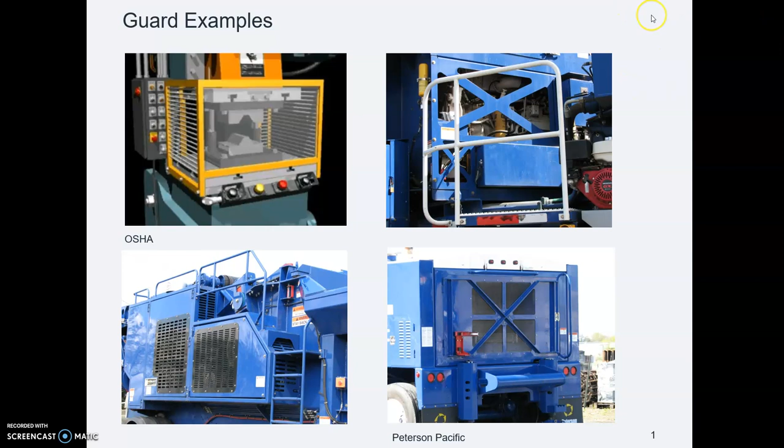So one of the things I collect examples of is guards, because when somebody says, hey, here's this machine, why don't you design a guard, you don't want to just say, oh my gosh, I have no idea how to do that. You want to go, just a minute, let me do a little research and I'll get right on that. So let's look at some ways you could do guards.

One way you could do a guard is make your own guards in your company's shop, out of plain old sheet metal. Here are some examples.

In the two upper left pictures, you'll notice these guards are quite simple—just flat pieces of sheet metal. This one has a little bit of a bend in it, and this one has some slots for adjustability. Those are fast and therefore inexpensive.

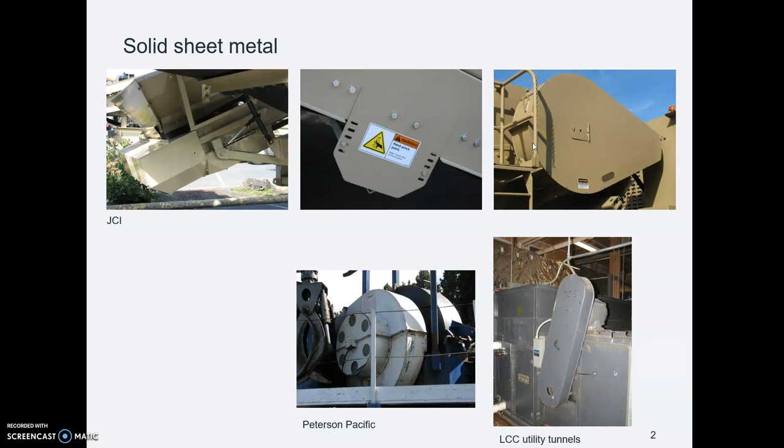This one here in the upper right is carefully designed to fit around two sheaves with a V-belt drive. Sometimes you need to do that for whatever reason, but be aware it does take up extra time in the shop to fabricate all that stuff.

Here are some other examples. In the bottom picture, from Peterson, here's an example I referred to earlier when talking about nip points. I mentioned you might not need a guard around the entire rotating thing if it's the bottom of the rotating thing and there's no nip point. This is probably a head pulley on a conveyor, and the belt will be going this way, so it cannot suck the operator in—you don't need a guard all the way down. Notice how a guard can serve more than one purpose.

If you go out and talk to the people in the shop—and I really hope you do, because they are the experts in making this stuff and sometimes in using it—let's say you're designing this white belt guard. They might tell you, if you weld some Gratex steps on here and put up a handrail, I could use this thing to climb over the equipment. So now it's not just a guard, it's a thing to climb on. And you will say, that's a very good idea, I will do as you suggest.

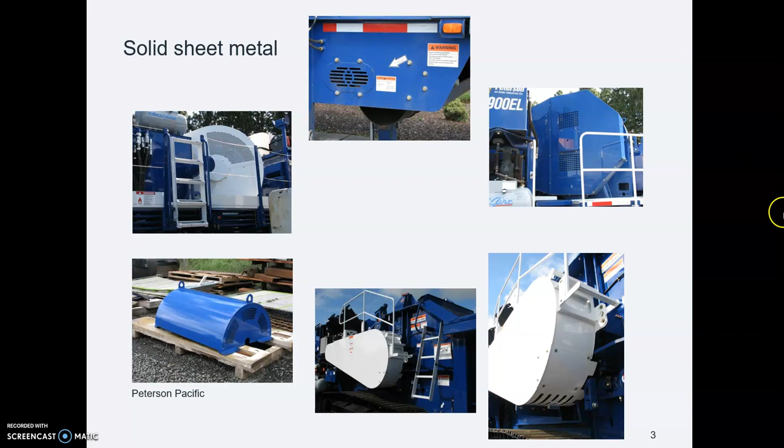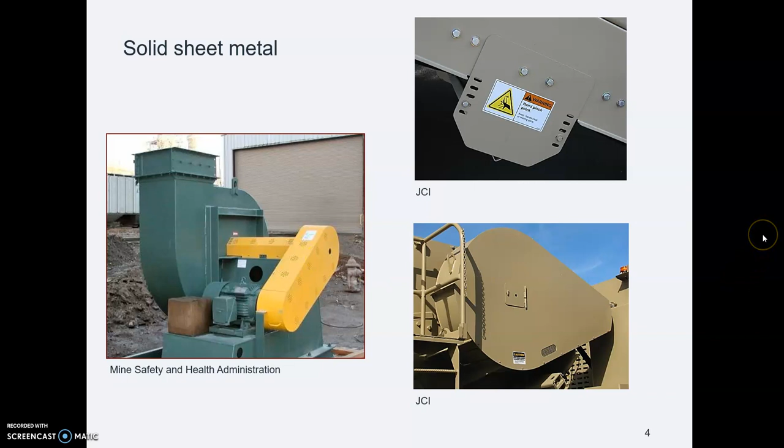Here are two more views of those same guards. And then here's this one. I don't know what this designer was thinking with all these punched holes. I guess they wanted to be able to see in a lot of places in this belt drive.

A variation on sheet metal is a thing called punch plate, which is where you take sheet metal and you punch holes in it. And if your shop has a CNC punch or a CNC plasma cutter or a CNC laser, CNC stands for computer numerical control, it is real fast to cut these holes, and you in your CAD drawing will just design the holes or slots however you think would work out well, and then they punch them real fast in this sheet metal.

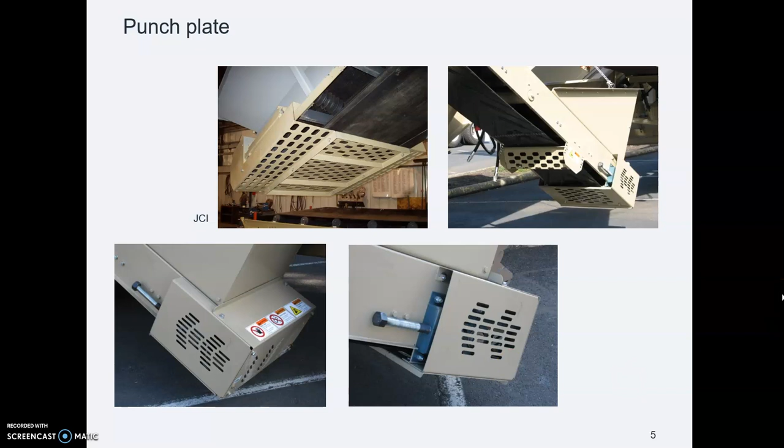And now we have a nice simple guard. It can be formed in a press brake simply. It's got holes in it so the operator can see what's happening in there. Here are some more examples of sheet metal with holes punched in it.

Here's an example. This was at Pacific Metal over at 2nd and Chambers. So they had a customer job. I forget what this was for, some kind of computer stuff, I think. And so here is the flat sheet metal with the holes punched in it. And then here is the flat sheet metal formed up.

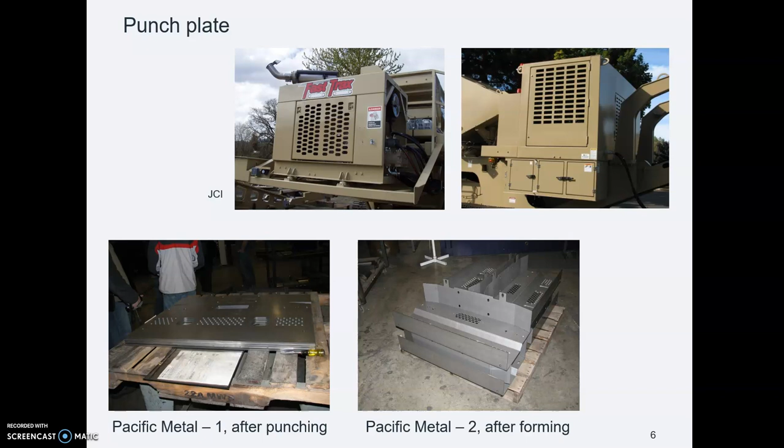So notice that the nice thing about punch plate is it's just like plate. You can form it, but it's got holes in it. Here's a JCI thing. Easy to form, easy to bolt together or weld together.

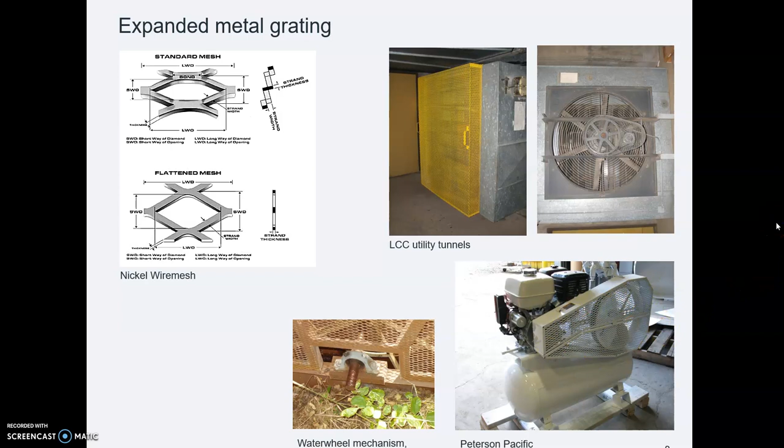Then some designers like to use expanded metal. You can use either that raised expanded metal, one brand is Gratex, or the flattened expanded metal. But in any event, it's got holes all over. It's just solid holes. So you can easily see through wherever you want to see through.

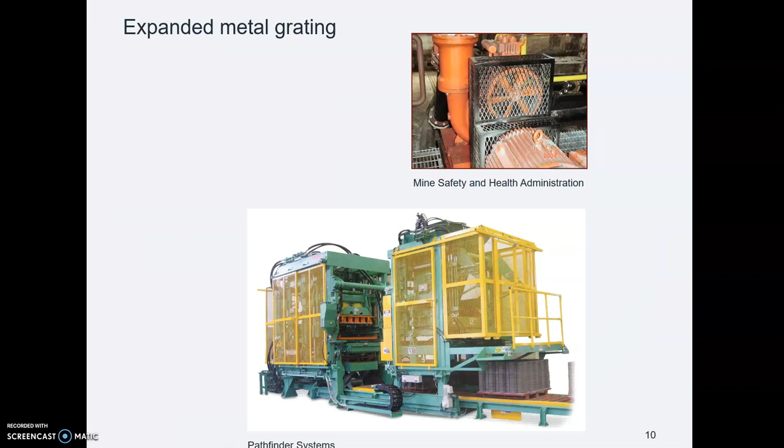Here's some more examples. This is quite common. You see this a lot. This used to be Weyerhaeuser in Springfield. Now it's International Paper.

A variation on that, stuff with holes all over, is a thing called wire cloth. And wire cloth is just like great big screen. It's pieces of wire woven together. That's why they call it wire cloth. And you'll notice that it is also very easy to see through, and like punch plate and expanded metal, it's strong.

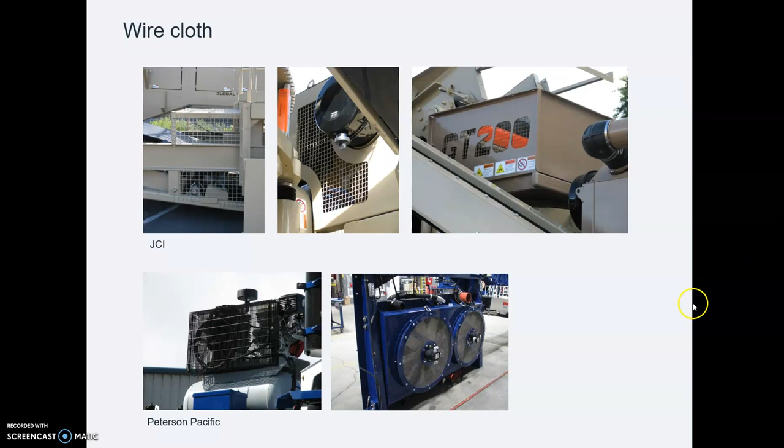In my opinion, I would think that it would be annoying to weld the wire cloth inside the frame because you got these little tiny pieces of wire. I talked to some welders at Peterson Pacific and they said, "No, we don't care, it's fine. We just weld like every third wire or so and no problem." And notice how easy it is to see through.

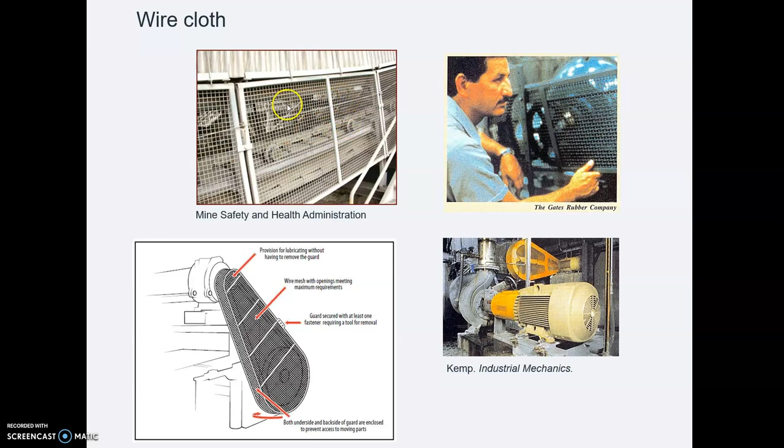This one here in the upper left is a guard over a belt conveyor. This is a big old long belt conveyor, probably carrying pit and quarry stuff, and you can see how easy it is to see through.

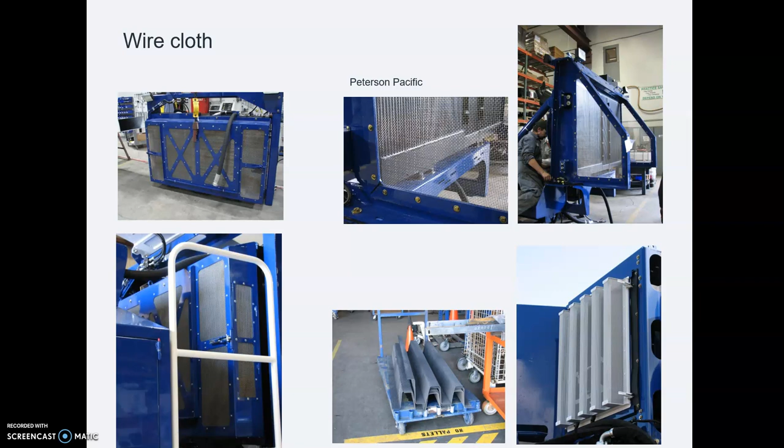The point I want to stress to you is start collecting some examples so that if you are faced with designing a guard, you will have some ideas for starting points. And then maybe you can go out in the shop and discuss this with your experts out on the shop floor.